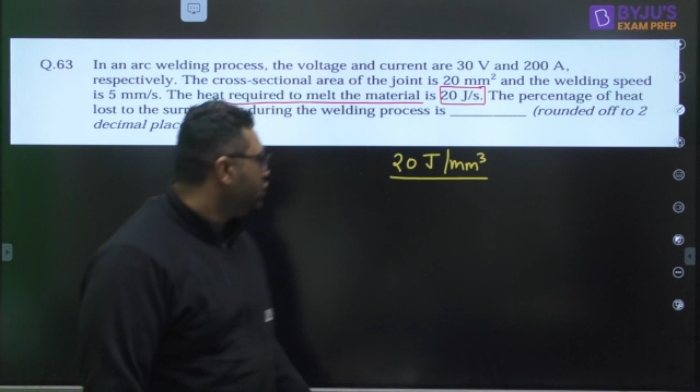And the heat required to melt the material - first of all, when we are talking about heat required to melt the material, this was given as 20 joule per second. This clearly looks like a misprint, because whenever you have done this for the GATE examination, for welding, in previous year's questions and standard books, every time it was given as 20 joule per mm cube. Because it is a property of the material, how much heat is required to melt this much material, since heat required for melting is mCp delta T plus m into latent heat. If we ignore delta T, this is m into latent heat - this is a property of the material. So even if you consider mCp delta T plus mL, they are still properties of the material. As it is a property, it should have this unit.

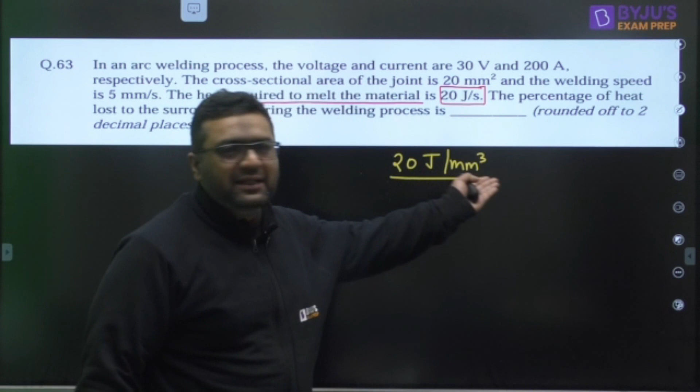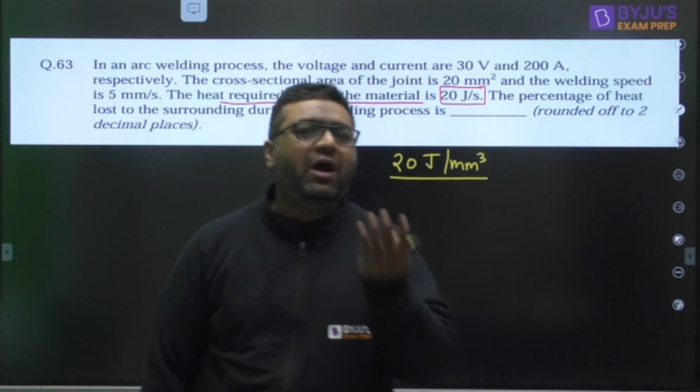When I got the data from the student side, I was also solving memory-based questions that day by taking this data, because generally questions come with that data only, and I thought students were making some mistake. But during that live session, students said no sir, it was given as 20 joule per second. But the point is, whenever we are solving a question, it's not our task to change the question statements. Even if you see it's given as 20 joule per second and you know it's wrong, when the question says that, you have to follow that only.

So that's why I solved it in front of you like that, taking this as 20 joule per second. We have written first of all power, that is the rate of heat generation, which equals V into I, that is 30 into 200, and we have written it as 6000 joules per second. Then we have seen that 20 joule per second is the heat requirement, so what they are asking is the surrounding losses. When we calculate the loss, it is 6000 minus 20, divided by 6000, into 100. When you solve this, you get the loss as 99.67%.

Okay, so this was the solution given on that day also, because if this is the statement, no doubt this will be the answer. No doubt, if you see losses of this much, it is not a practical case. Practically, when doing welding, it is not like 99% is going to be loss. Loss cannot be that much.

Okay, otherwise it is not going to be correct data for sure. But in the question paper, this is not our authority to change the statement, because if they have given some statement, we have to follow that. So if you go by that data, the answer is this, but they have given the answer as 66.67%.

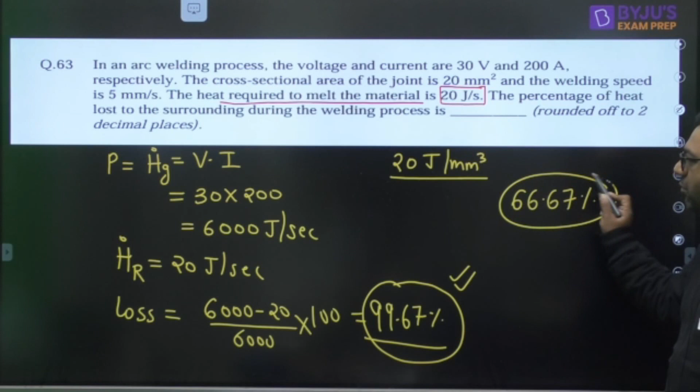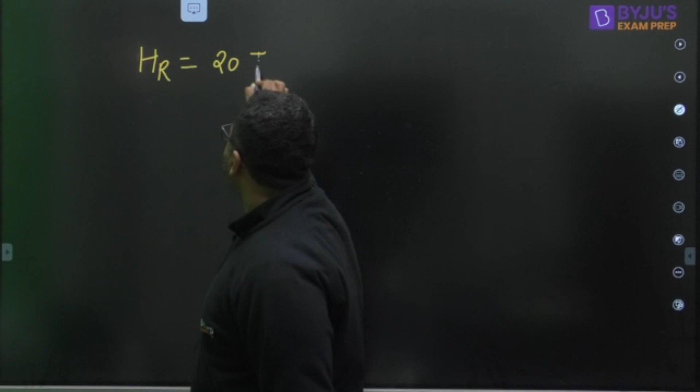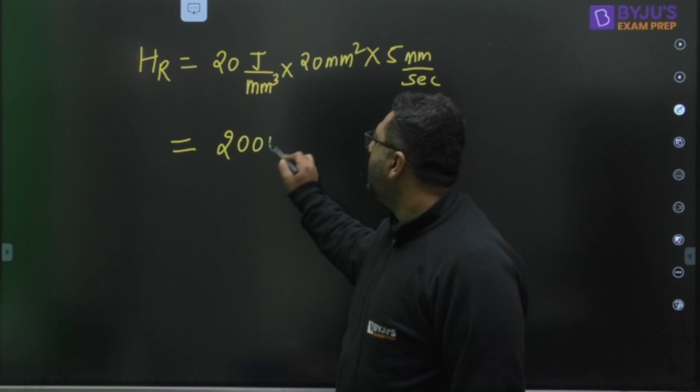That can come only if we consider this 20 joule per second as 20 joule per mm cube, because in that case, when finding the heat requirement, you would write 20 joule per mm cube into 20 mm square into 5 mm per second. So when you go for this, you would get 2000, that is joule per second. This is the heat required rate.

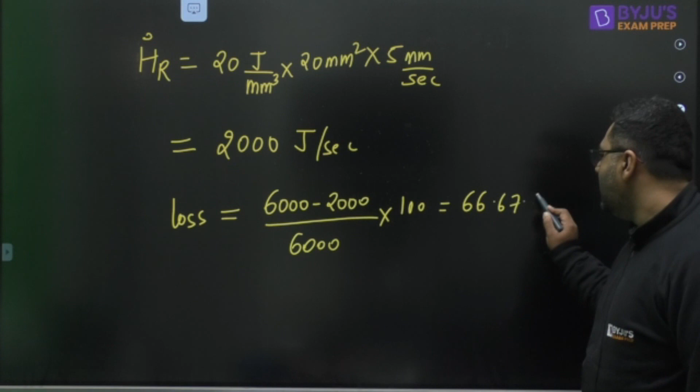Now when you go for the loss to the surroundings, percentage loss, you would have 6000 minus 2000 divided by 6000 into 100. So you would get it as 66.67%. And in the exam also, many students have done it like this. And obviously, if you see the official answer key, they have given this as the answer.

So when we are talking about the question, no doubt this should be the correct way to do it. But in the data, they have mentioned 20 joule per second. So because of that reason, it is for sure that whatever answer key they are giving, that is not matching with respect to the question.

So this question is one where my suggestion is yes, the challenge should be done. Now, when we are talking about the challenge being done, the reason you should know is that if you take this data, then the answer should be 99.67%.

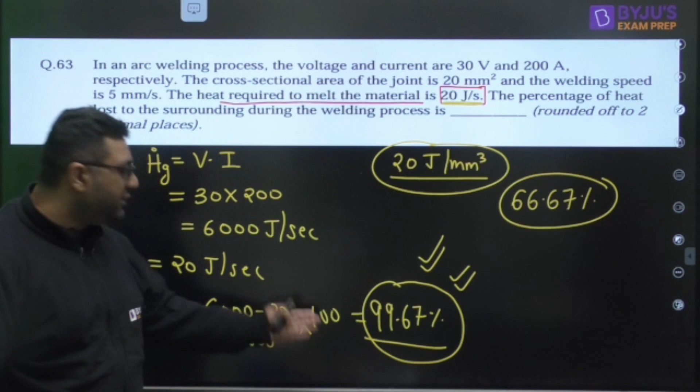Now when you go for this application, whether they are going to give marks to all or they are going to change the answer, that depends on the GATE people, because they must have some criteria for that. Based on that, they will take the decision.

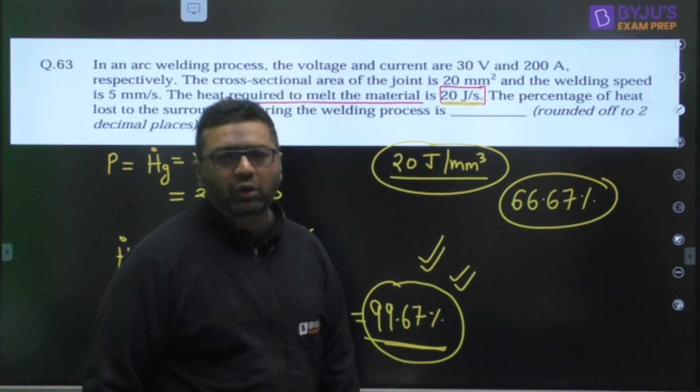But yes, this is a question where ambiguity is there and it should be challenged, okay, because if you see the data, the answer should be 99.67%, and if they accept it was a typing error, then marks should be given to all. Based on that they will take the decision. Okay, so this was the one question.

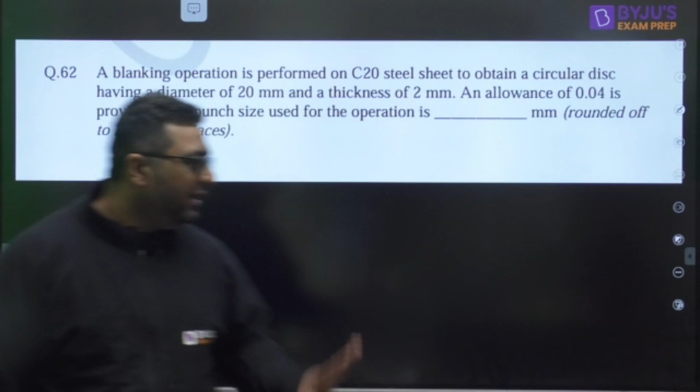Then I am talking about the second question. There also students were having doubt. Here ambiguity is there in the data. Actually, whenever we are talking about this blanking and punching question, you must have seen generally we write that punch size is equal to die size minus 2 times of radial clearance.

This you have seen, but if you see the question, in the complete question, a blanking operation is performed on C20 steel sheet to obtain a circular disc having diameter 20 mm, thickness 2 mm, and allowance 0.04 is provided. The punch size used for the operation is asked, and they want the answer in mm. So they are not mentioning any word like clearance.

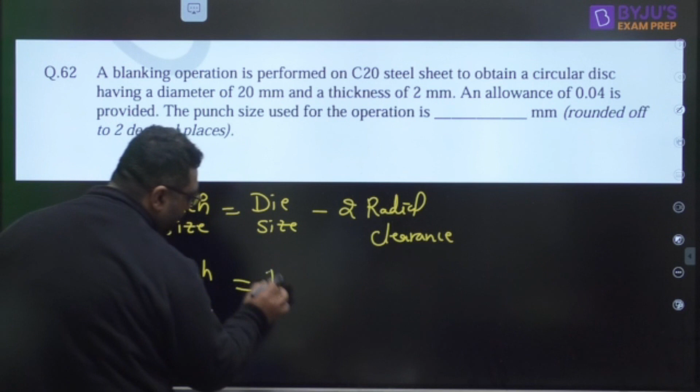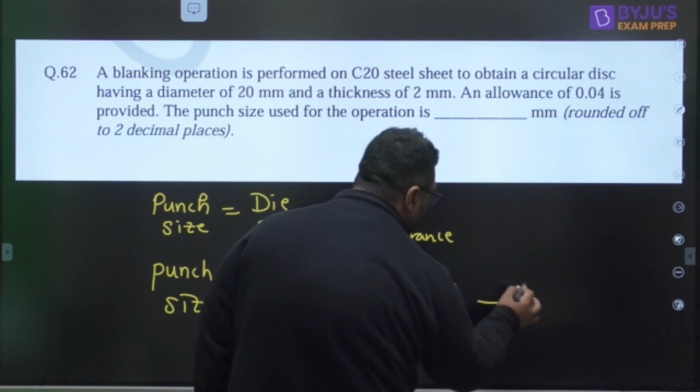So then, if you see, there was a question in a previous year's GATE where they have given allowance also, clearance also. There the formula used was punch size is equal to die size minus 2 times of radial clearance, and then minus allowance. So this formula is also used in that question, and also I would like to tell you in the standard books, if you follow, this formula is mentioned. Okay, but only once has this type of question been asked where it was given like that.

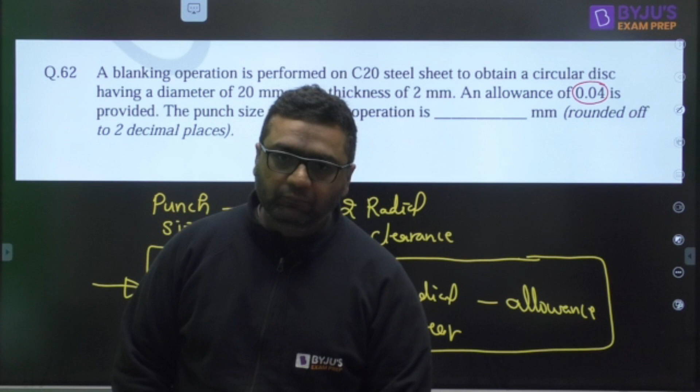But the problem is, first of all, even if you are going to use this formula, you should see that there is a problem: they have not given the units for this 0.04. The units for this 0.04 were not given. Okay, so as the units were not given, because of that, some students may also have done it differently.

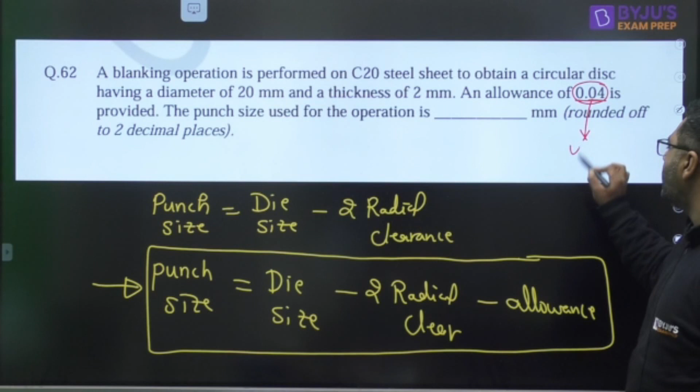Generally we are writing the radial clearance as percentage of thickness. So they have considered that this 0.04 means it is 4%. So if we take this 4%, we write 4 by 100 into the thickness. Thickness is nothing but 2 mm. When you consider this, you get 4 into 0.02 is 0.08.

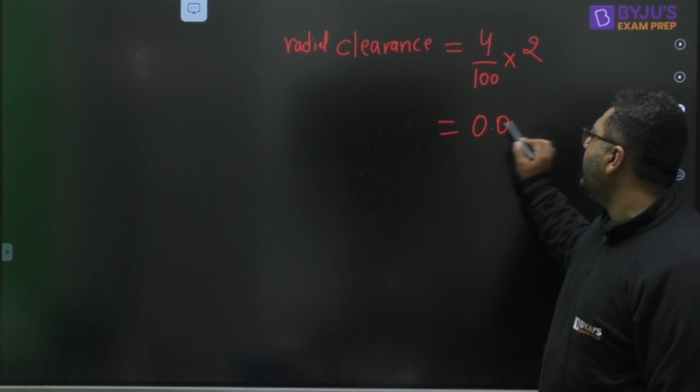Okay, and then you know we are going to apply the formula for punch size equals die size minus 2 times of radial clearance. So if some students have done it like that, they may be getting the correct answer.

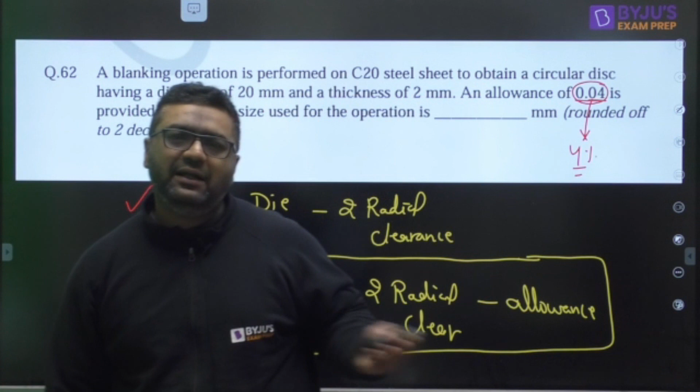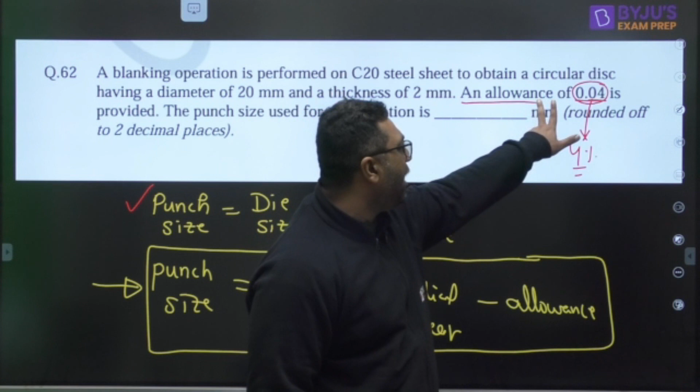So the point is whether this question is challenged or not. So I would like to say, if you see the reason, yes, the reason is there because they have mentioned an allowance. They have not mentioned whether it is radial clearance allowance or diametral clearance allowance. They have not mentioned, and they have also not mentioned the mm units. So ambiguity is there in the question for sure.

It also happened many times that whenever you find a question where the answer given doesn't match, students have challenged it, and that challenge was accepted. But it's not going to be the case every time. Sometimes even if they are giving a wrong answer, they are not accepting that challenge.

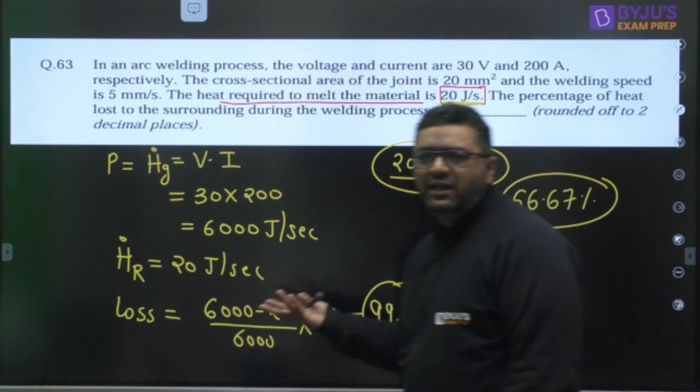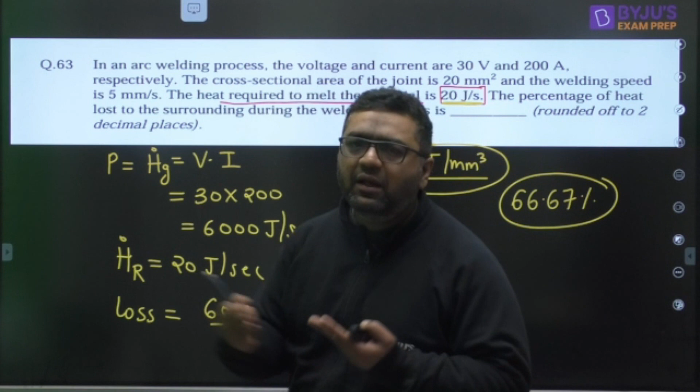The reasons may be many for that. So for this welding question, it is sure that it should be challenged. What will be the impact? Maybe, because majority of the students have done it as per the data point of view, marks to all are already coming. So every student's marks may not be affected much, but some individual cases will be there. Based on that, yes, this question should be challenged.

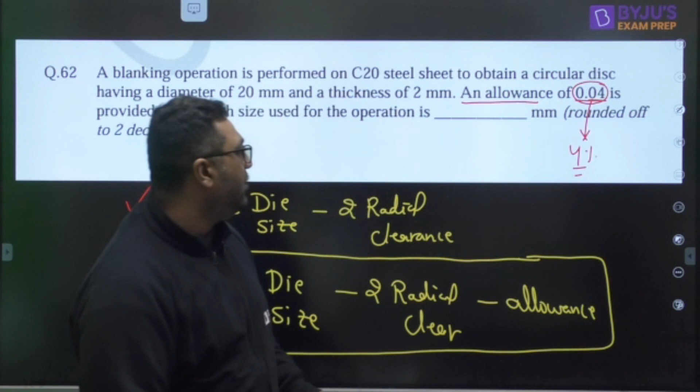But when we talk about this question, you can challenge it based on ambiguity, but we cannot say for sure they will accept that challenge, because they have not given the units for this, so majority of students can think of it that way. But if we are talking about the formula for allowance, this is given in standard books. In that way, yes, it can be challenged, but whether it will be accepted or not depends.

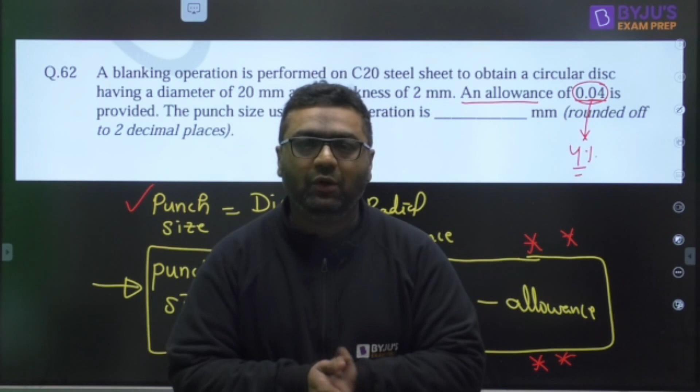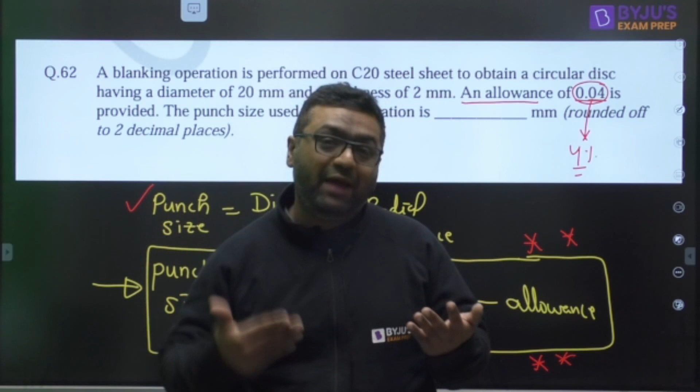So that will be totally your choice. If you feel that if I do that and the challenge is accepted, I may get into IIT or I may get into PSU, then you can go for it. So this is my advice.

But yes, for the previous question, it should be challenged for every reason, because the data given was not appropriate, and if we go by that data, the answer should be 99.67%. So this is about my production question.

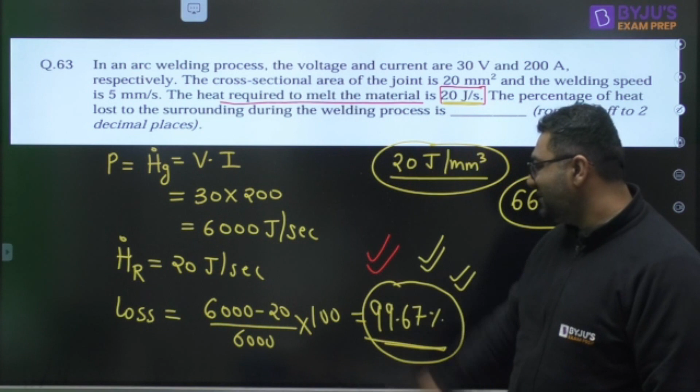Now Chandra sir's HMT and fluid mechanics question suggestions, you can see. But as I said, these are suggestions from our side. What finally is going to happen, the final call is for IIT people. But yes, you can follow these instructions, that will definitely help you to challenge the question, and if that is going to benefit you, you should go for it.

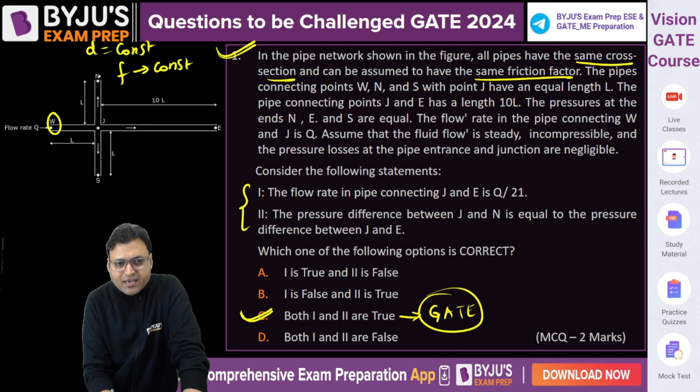Equal length L. The pipe which is connecting the point J and E has a length of 10L. The pressure at the ends N, E and S are equal.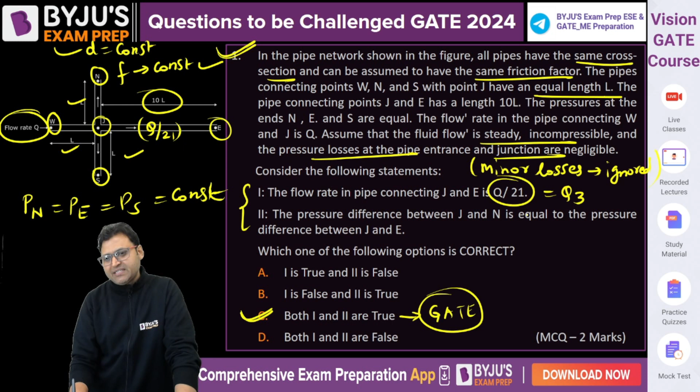So direction of flow is already given. So Q is the discharge entering into the junction. Let me assume it as Q1, Q2, and Q3. So Q will be equal to Q1 plus Q2 plus Q3. That is equation number 1. Now the first part is Q3 is equal to Q by 21, which is given. So we need to develop a relation for Q3 as a function of Q, or find out the value of Q3 in terms of Q.

Now this is the continuity equation. I have applied continuity equation for a junction. For a junction, net flow rate is 0. At any junction, net flow rate is 0.

Now, if we apply the energy equation, the head at J is, let us say, Hj. For a junction, let me call it point J here. Let me call this point J1, J2, and J3. So in pipe 1, the inlet point is J1. For pipe 2, the inlet point is J2. And for pipe 3, the inlet point is J3. And the end of the pipe WJ is point J.

So according to the energy conservation equation, energy at point J will be equal to energy at J1, equal to energy at J2, equal to energy at J3. Isn't it? The junction is shared by 4 pipes: the end of the pipe W, the inlet of pipe JN, the inlet of pipe JE, and the inlet of pipe JS.

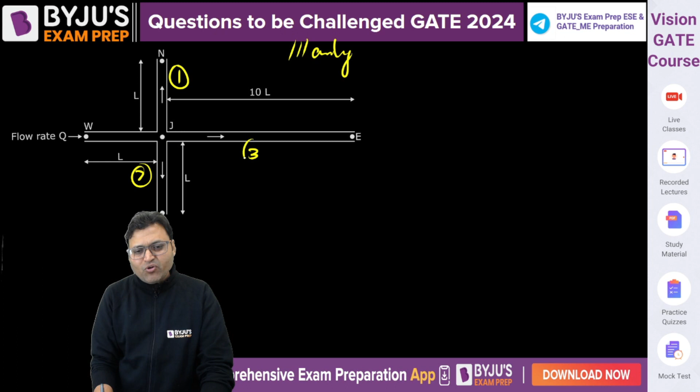Similarly, can we write HJ2, this point is J2, minus HS is equal to HL2? Or can we write PJ2 minus PS by rho G is equal to HL2? And this is point J3. So HJ3 minus HE, because the flow is from J3 to E, is equal to the loss in pipe 3, that is HL3. Because there is no change in potential energy or kinetic energy in any of the pipe, we can say PJ3 minus PE by rho G is equal to HL3, isn't it?

And because J1, J2, J3 are same point, we can say PJ1 is equal to PJ2 is equal to PJ3. The pressure at J1, J2, J3 will be equal. Also given is PN is equal to PS is equal to PE. So if PE equals PS equals PN and PJ1 equals PJ2 equals PJ3, from these three, can we say HL1 is equal to HL2 is equal to HL3? I hope that is clear.

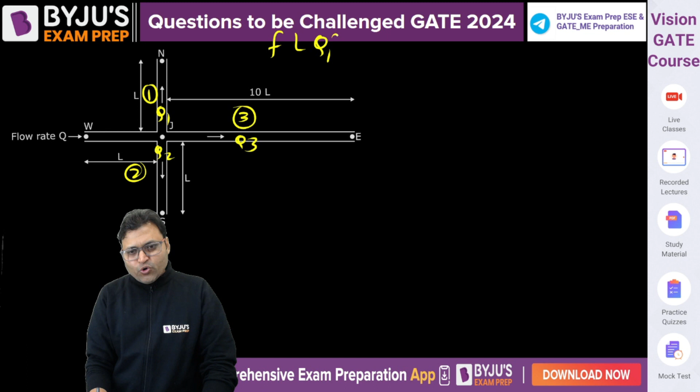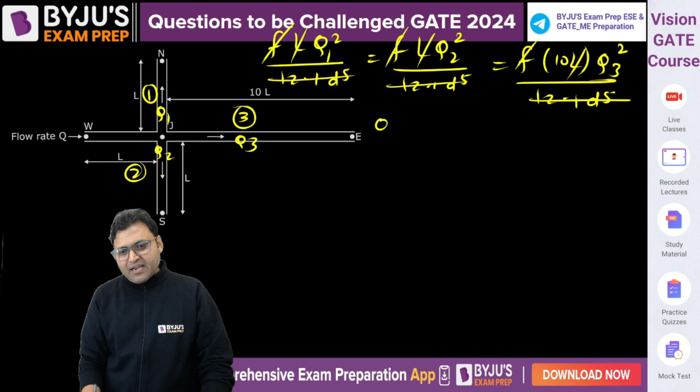Now, what is HL1? This is pipe 1, pipe 2, pipe 3, and this is Q1, Q2, Q3. So HL1 is FL Q1 square upon 12.1 d to the power 5, is equal to FL Q2 square upon 12.1 d to the power 5, is equal to F into 10L into Q3 square upon 12.1 d to the power 5. Diameter is constant. Denominator is same everywhere. Friction factor is same everywhere. L will also cancel out. Q1 square is equal to Q2 square is equal to 10 Q3 square, or Q1 is equal to Q2 is equal to root 10 Q3.

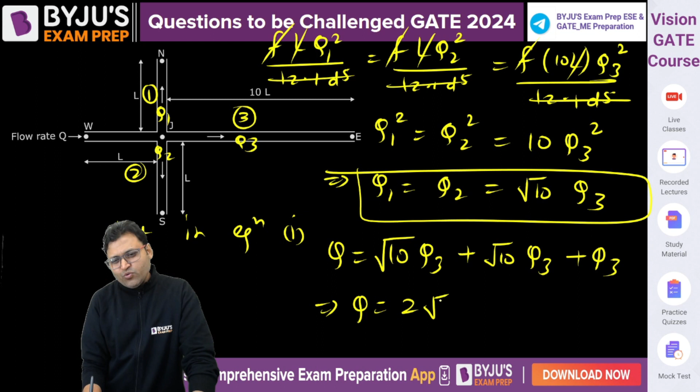If we put in equation number 1, then Q is equal to Q1, that is root 10 Q3, plus Q2, that is also root 10 Q3, plus Q3. So Q is equal to 2 root 10 plus 1 into Q3, or Q3 will be equal to Q upon 2 root 10 plus 1. This should have been the answer, right?

If you see the options, the flow rate in the pipe connecting J and E is not Q by 21, it will be Q by 2 root 10 plus 1. So statement 1 is incorrect. The pressure difference between J and N, that represents the head loss due to friction, is equal to pressure difference between J and E. Yes, the loss will be same in all the three pipes. So statement 2 is correct. That is why option C cannot be correct for the given question. I hope that is clear.

Now how they had framed the question. If we assume the flow to be laminar, for laminar flow, F is equal to 64 by Reynolds number, that is, 64 mu upon rho Vd. 64 is constant, mu is constant, rho, the density of the fluid, is constant, and diameter is also same. So F is inversely proportional to V, or F is inversely proportional to Q, because Q is equal to pi by 4 d square into velocity. If diameter is constant, Q is proportional to V.

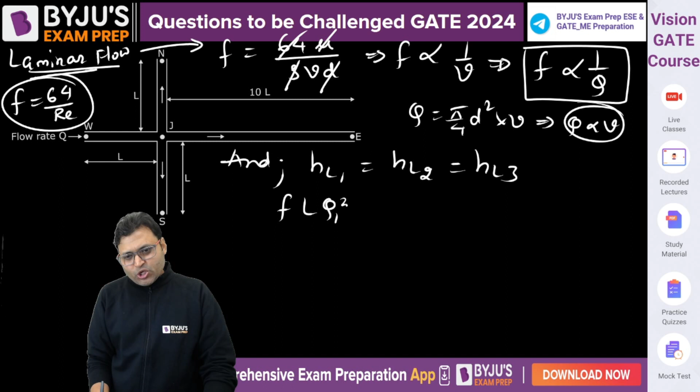So for laminar flow, we have already said that HL1 is equal to HL2 is equal to HL3. HL1 is FL Q1 square upon 12.1 d to the power 5, where F is inversely proportional to Q, is equal to FL Q2 square upon 12.1 d to the power 5, is equal to F into 10L into Q3 square upon 12.1 d to the power 5. Look, because they have specifically mentioned, first of all, laminar is missing here.

It is nowhere mentioned that the flow is laminar. That is one problem. So we cannot assume it as laminar as long as it is not given. If they would have mentioned, assume that the fluid flow is steady, incompressible and laminar. That is one thing. The second is the same friction factor.

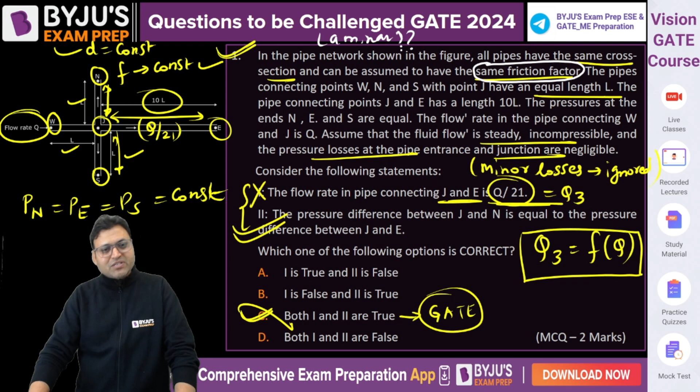If the friction factor is same, it means discharge should also be same, isn't it? Because f is inversely proportional to discharge. If the friction factor is same, then the discharge should also be same. But if we assume that the friction factor is not same, try to understand, f1, then it is f2, then it is f3, let us say. Length getting cancelled out, denominator will get cancelled out.

f1 is proportional to 1 by Q1, or let me write it like this. 1 by Q1 into Q1 square is equal to 1 by Q2 into Q2 square is equal to f3, which is 1 by Q3, so 1 by Q3 into 10 Q3 square. So if we simplify this, Q1 getting cancelled out, this is also getting cancelled out. So we get a relation Q1 is equal to Q2 is equal to 10 Q3.

In this case, if we assume the flow to be laminar, and if we assume that the friction factor in each pipe is not same, that is where they had committed the mistake. First, they had not mentioned the flow to be laminar. The second problem is they have specifically said that the friction factor is same in all the pipes.

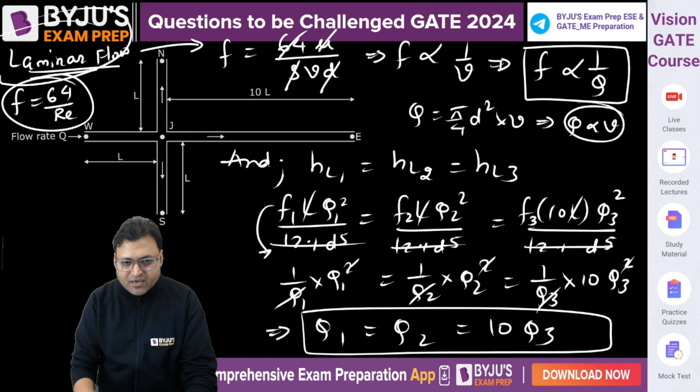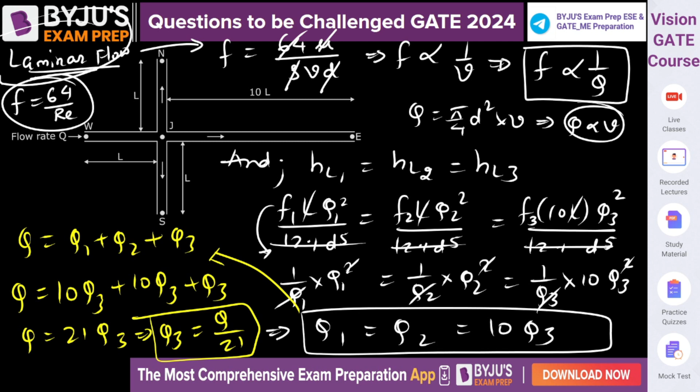So if we put this condition in equation number 1, which was Q is equal to Q1 plus Q2 plus Q3, then we will get Q is equal to 10 Q3 plus 10 Q3 plus Q3. So Q is equal to 10 plus 10 plus 1, 21 Q3, or we will get Q3 is equal to Q by 21. That is why this question must be challenged. I hope this is clear. That is the question from the fluid mechanics.

Now let us move to another question which was asked from heat transfer, which again involves the concept of fluid mechanics because it is from forced convection heat transfer in a pipe. Consider a hydrodynamically fully developed laminar flow through a circular pipe with the flow along the axis, and the flow direction is z direction. It is not given as x direction, it is given as z direction.

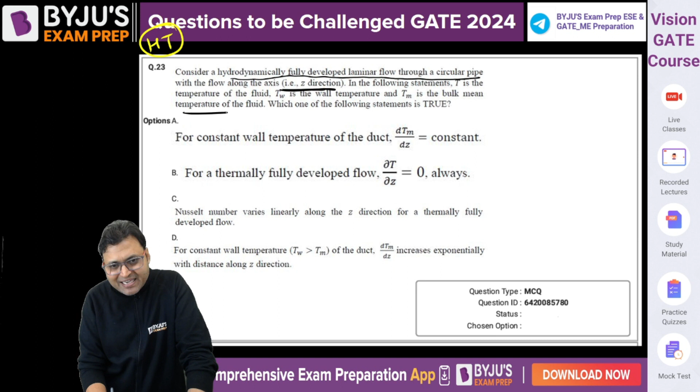In the following statements, T is the temperature of the fluid, variable temperature. TW is the wall temperature of the pipe surface, and Tm is the bulk mean temperature of the fluid at any particular section Z. Which one of the following statements is true? This is statement A.

Statement A says for constant wall temperature of the duct, if TW is constant, then dTm by dz, the slope of mean temperature Tm as a function of Z, is constant. What does that mean? Tm is a function of Z which is linear.

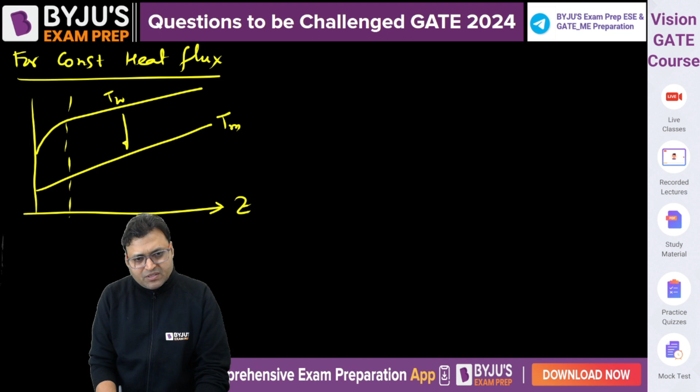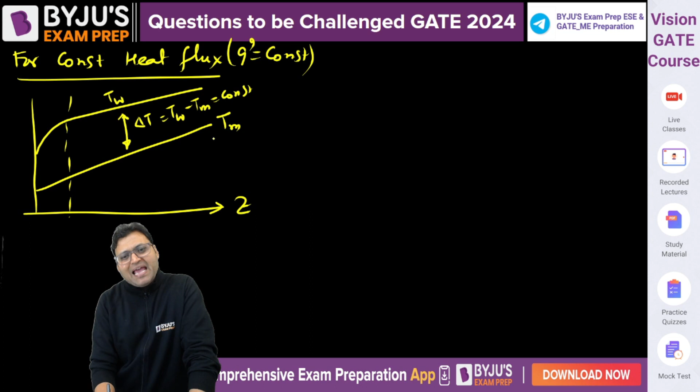Like this. This should have been the temperature profile. This is the developing region, this is the mean temperature and this is the wall temperature. For constant heat flux condition, delta T, that is TW minus Tm, would have been constant. For constant heat flux, q dash is constant, Tm would have been a linear function of Z, or we could have said dTm by dz would have been constant. That would have been true for constant heat flux.

But for constant wall temperature, if the wall temperature TW is constant, the temperature profile of the fluid will be something like this. This is Tm, mean temperature, right? For TW to be constant, Tm as a function of Z is exponential.

So we can find out LMTD, logarithmic mean temperature difference, from here, because the temperature variation with Z is exponential. So dTm by dz is also exponential.

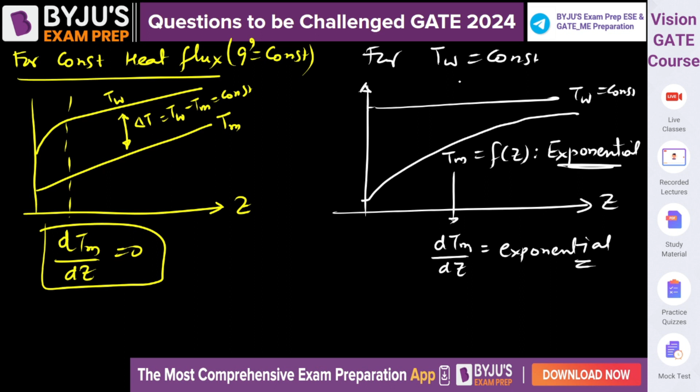Differentiation of exponential function is also exponential function, right? So for constant wall temperature of the duct, dTm by dz is not constant, it will be exponential. First statement is incorrect.

Now for a thermally fully developed flow, people have a doubt in this expression: del T by del z is equal to 0. Because for a fully developed velocity profile, u is not a function of z, or del u by del z is equal to 0. But here it is not about the velocity profile, it is about the thermal or temperature profile.

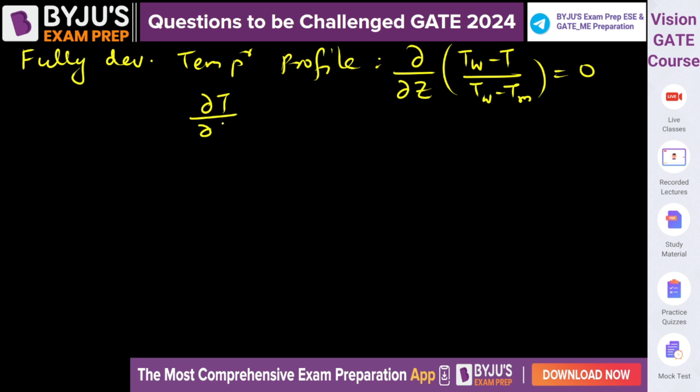For a fully developed temperature profile, it is del by del z of (TW minus T) upon (TW minus TM) equal to 0. Del T by del z is not 0, unlike the velocity profile. For the fully developed velocity profile, U is not a function of z, but the temperature of the fluid is a function of z. Del T by del z is non-zero, right?

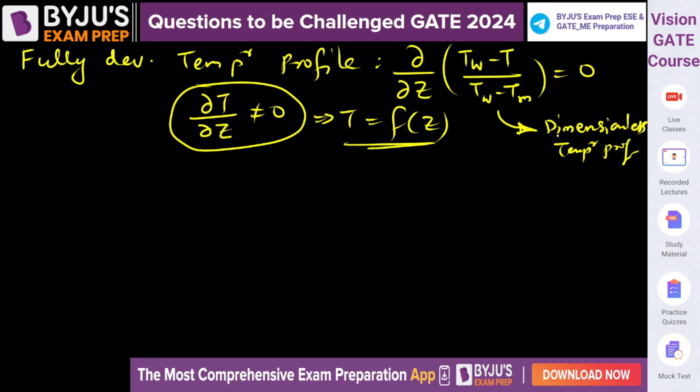But this dimensionless temperature profile will be zero, not the given condition. Option B is also incorrect.

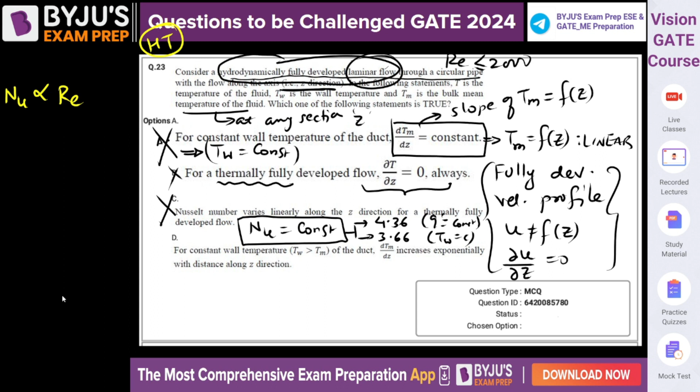If we assume it as turbulent flow, Nusselt number is directly proportional to Reynolds number to the power, do you remember? 4/5 and Prandtl number to the power 1/3. For turbulent flow, Reynolds number to the power 4/5 into Prandtl number to the power 1/3.

How do we define Reynolds number? Reynolds number is given as rho v d by mu. It is not a function of z, so Nusselt number will not be a function of z. In the flow direction Reynolds and Nusselt number won't change, so option C is also incorrect.

Option D: for constant wall temperature where TW is greater than TM of the duct, dTm by dz varies exponentially, but the slope decreases with the distance along z direction. That is the slope of Tm versus z.

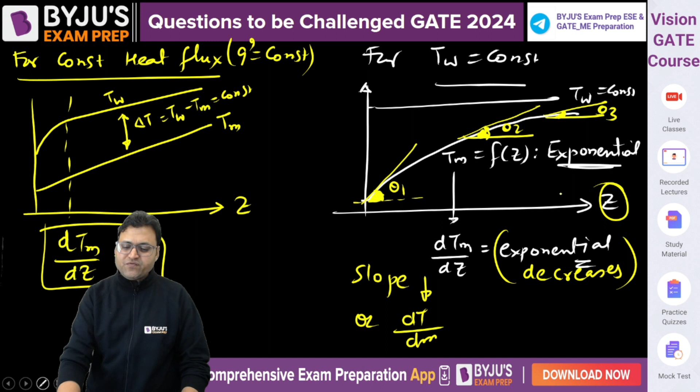So the slope decreases, or we can say dTm by dz decreases exponentially in the direction of z. The problem in the fourth statement is that it says it increases exponentially.

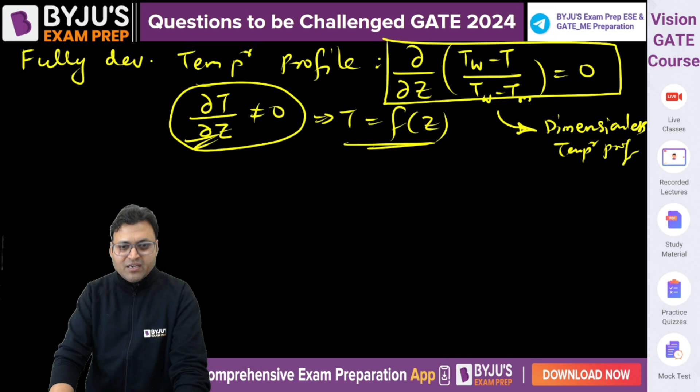Finally I came to the conclusion that because they wanted to frame a very new, different question, they included so many parameters in a single question, and there is a fair chance they ended up framing the question incorrectly.